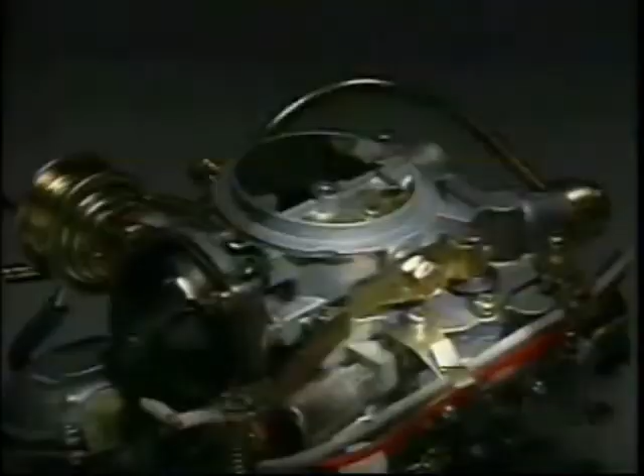Next is the primary high-speed circuit. The construction of this is similar to that in the carburetor model we looked at earlier. It is the most widely used main circuit, although there are mechanisms to activate to assist when extra speed is needed. This side is the primary barrel on this model.

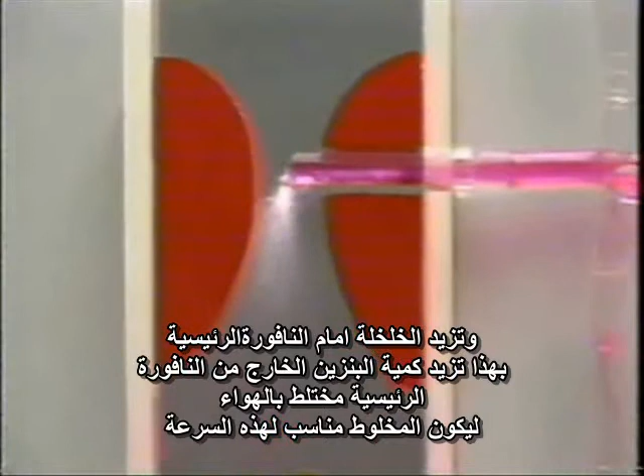The Venturi is designed this way for maximum mixing of air and fuel.

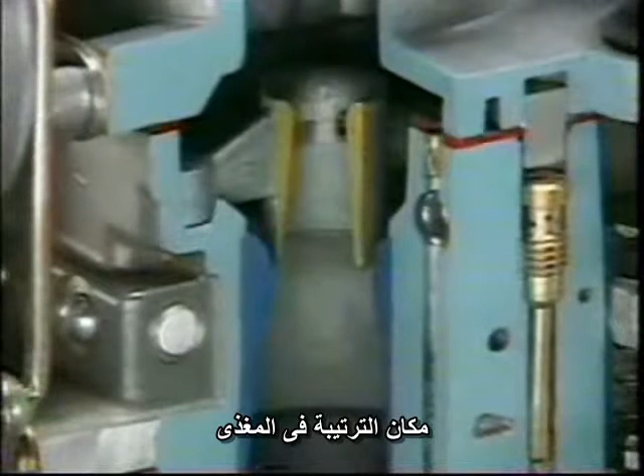The primary high-speed circuit works as follows. When the throttle valve is opened wide, allowing for a higher speed and volume of air to the Venturi, the amount of fuel that is delivered is equivalent to the intake air volume drawn into the barrel.

The amount of fuel is controlled at the main jet before it is mixed with the primary air bleeder and injected from the main nozzle. The fuel is atomized by the air flowing at high speed past the Venturi, from which it enters the combustion.

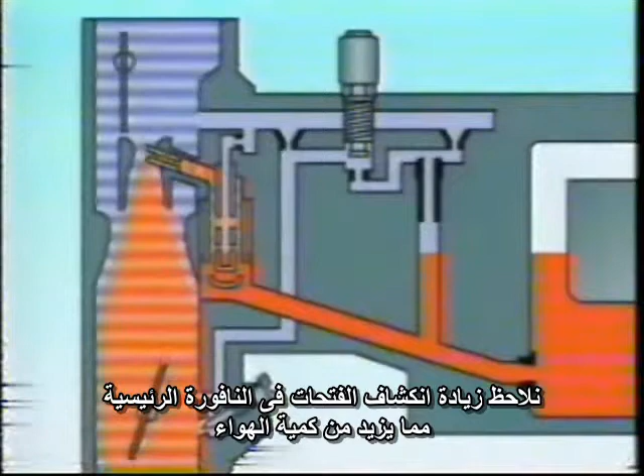This is how the air-fuel mixture is regulated during idling at low and medium speeds. However, this alone will not produce the power needed during high-speed operation. This is why the double-barrel carburetor has a secondary barrel.

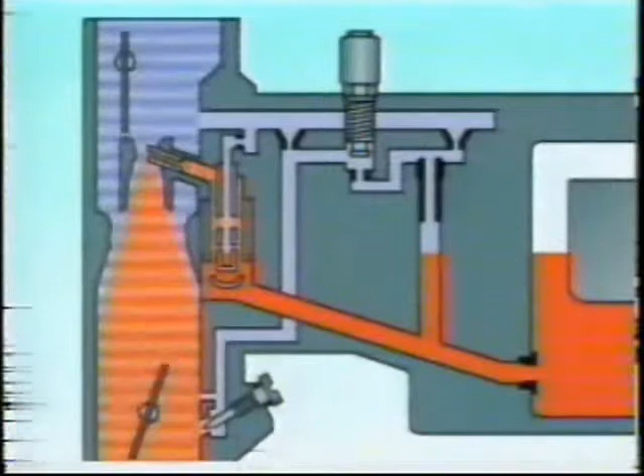The construction of the secondary barrel is the same as that of the primary barrel. It has a high-speed circuit, which is its main circuit, and a low-speed circuit which prevents the mixture from becoming too lean when the throttle valve opening on the secondary side is small.

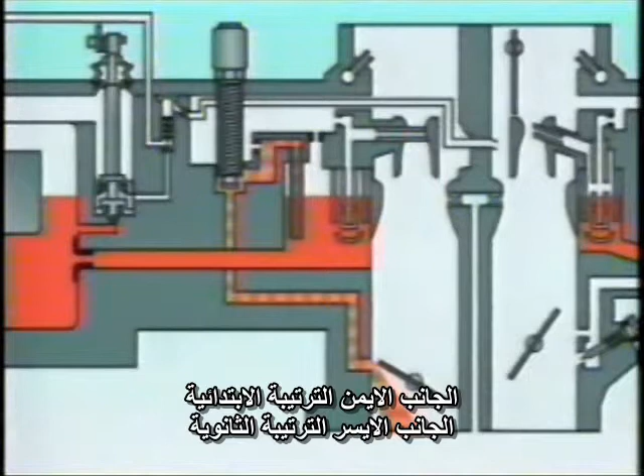Let's look at the secondary low-speed circuit for the secondary barrel.

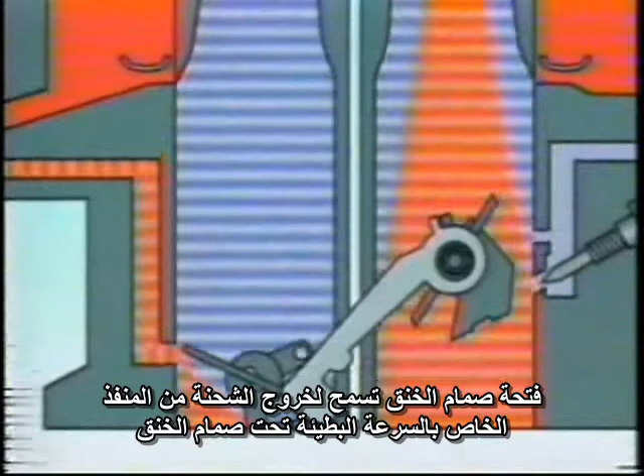When this happens, the vacuum bleeder, which is part of the Venturi, produces a vacuum which opens the secondary throttle valve. When the engine RPM rises, the pressure from the vacuum bleeder overcomes the diaphragm spring, which in turn causes the secondary throttle to slowly open.

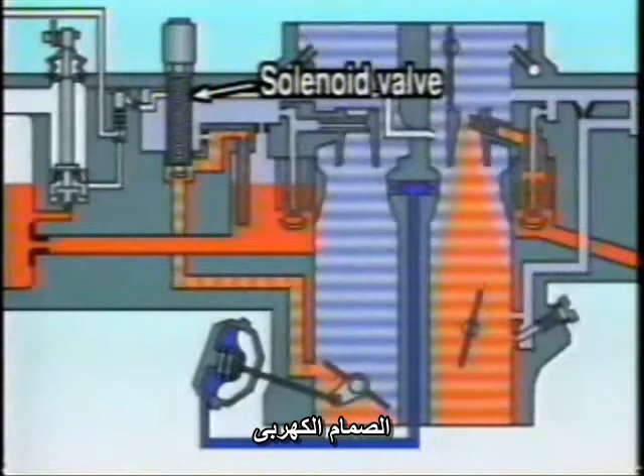The secondary low-speed circuit, like the primary low-speed circuit, uses a solenoid so that when the ignition switch is off, the route is closed off.

Now let's move on to the secondary high-speed circuit.

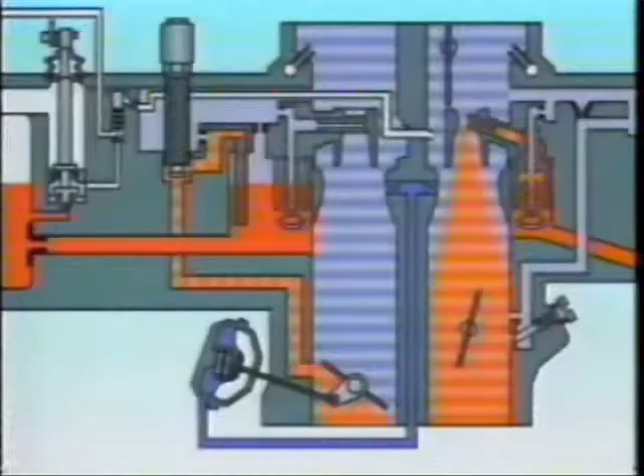When the secondary throttle valve starts to open, a vacuum is created by the vacuum bleeder. This is strengthened by the diaphragm, which causes the secondary throttle valve to open further. The fuel is injected from the secondary main nozzle.

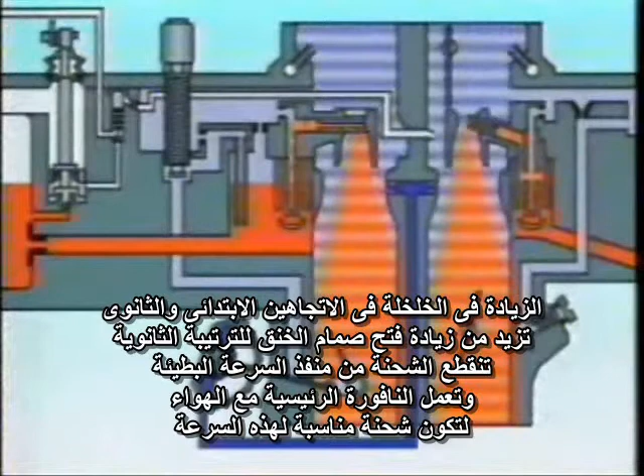In this way, both the primary and secondary barrels work together to produce the air-fuel mixture necessary for high power.